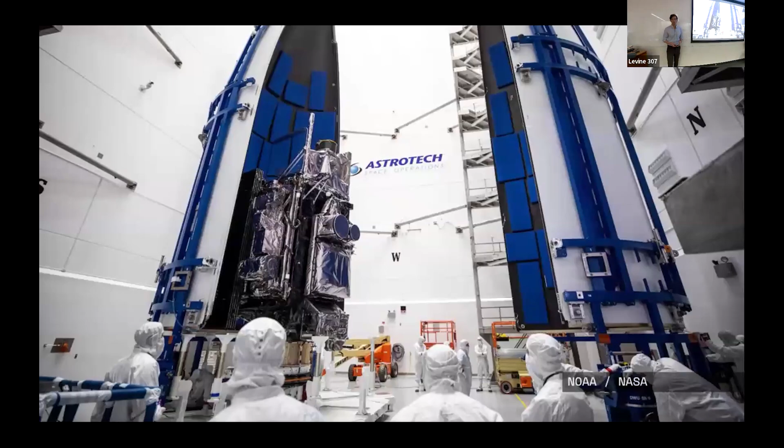trying to design and fabricate robots or using principles from modular and reconfigurable robots to perform assembly. But the key challenge we're interested in is trying to enable end users to design and fabricate stuff at points of need. And to illustrate why I think this is important, I'll start with a particularly noticeable point of need, which is the space environment. So anything we launch to space today has to fit within the confines of a rocket fairing, which is typically no larger than 3 or 4 meters in diameter.

And once we package our robots or our structures into these rocket fairings, they then have to withstand the rigors of a launch, which can be upwards of 9 Gs. And once these artifacts reach orbit, they then have to be either assembled or maybe maintained or even repaired by teams of people who don't necessarily have manufacturing experience in some of the harshest conditions that we know of.

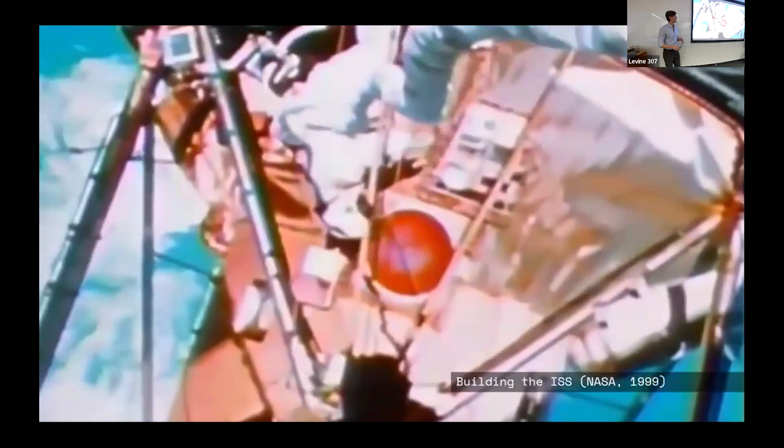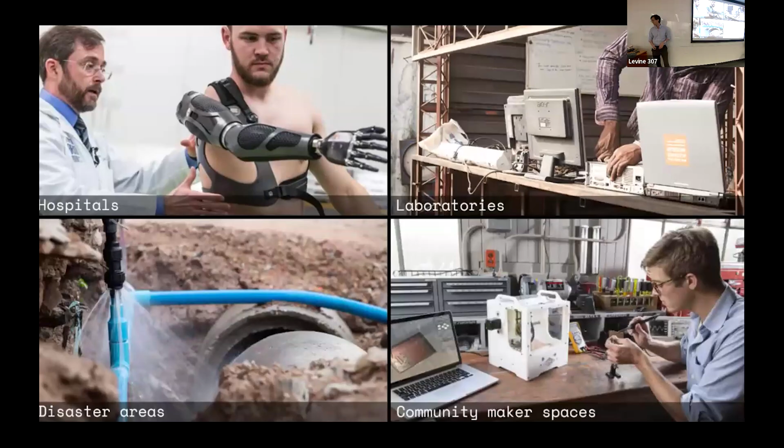But these challenges are mirrored on Earth as well. So in hospitals, in laboratories, in disaster areas, and even community makerspaces, these are all environments that require unique hardware solutions with both speed and customization that a kind of centralized mass manufacturing paradigm that we have today doesn't really provide.

And this is because centralized mass manufacturing places some pretty hard constraints on our ability to customize individual items for individual needs and interests, to deliver them to the right places at times of need, and also to transport them across not just global, but increasingly extraplanetary supply chains, which are subject not just to volume constraints as they're shipped, but also to global political and economic stability.

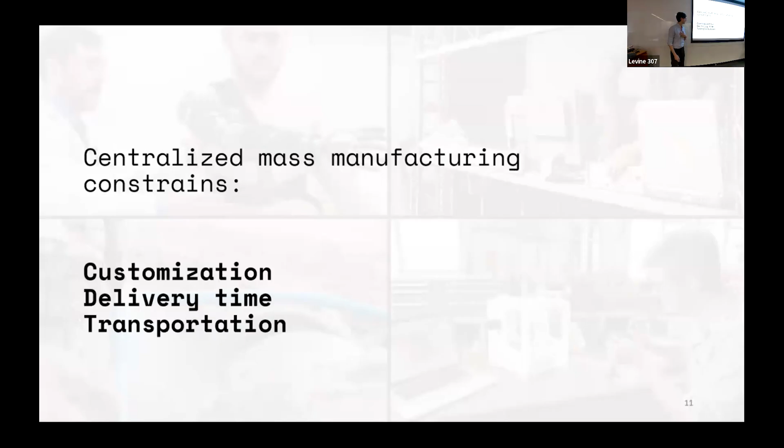And so I think creating new manufacturing capabilities that can be deployed at these kinds of points of need requires addressing 2 key challenges. So on the one hand is portable hardware systems for fabrication that can operate autonomously outside of these traditional manufacturing ecosystems. And second, we need new software tools or new design tools to actually allow users to design new things that these hardware platforms can actually produce.

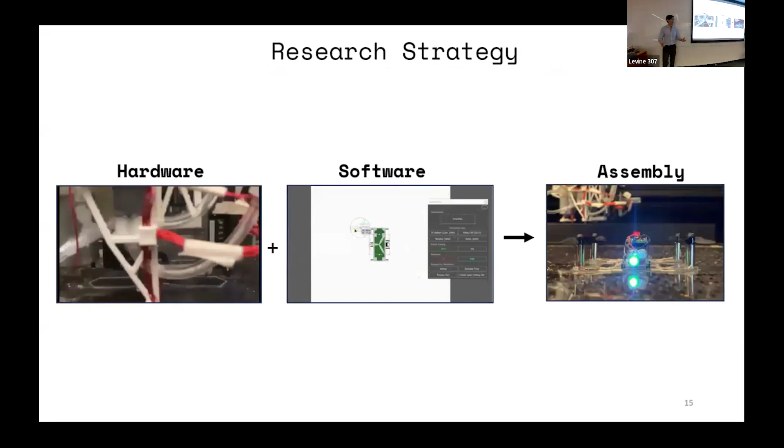And so in our research, we generally co-develop hardware and software systems to allow end users to design and fabricate things at the locations where they are intended to be used.

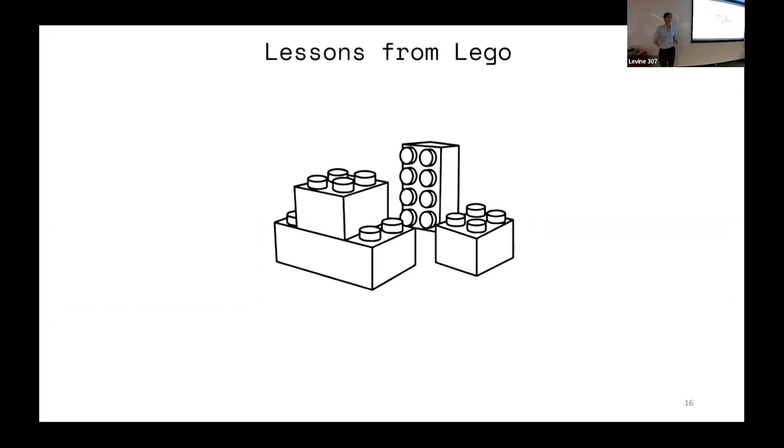So to illustrate how we think about breaking down problems to be solved, I want to start with a kind of toy problem. So I played, the first things I built stuff with was with Legos. Probably the same thing applies to many of you. But Legos provide some unique capabilities. So they can be transported compactly. They can be assembled in very complex geometries. And they can also, maybe most importantly, allow this to be done easily.

So I wanted to highlight 3 attributes that I think make Legos such a powerful platform for manually assembling stuff, and talk to you about why or how we can use these to automate assembly.

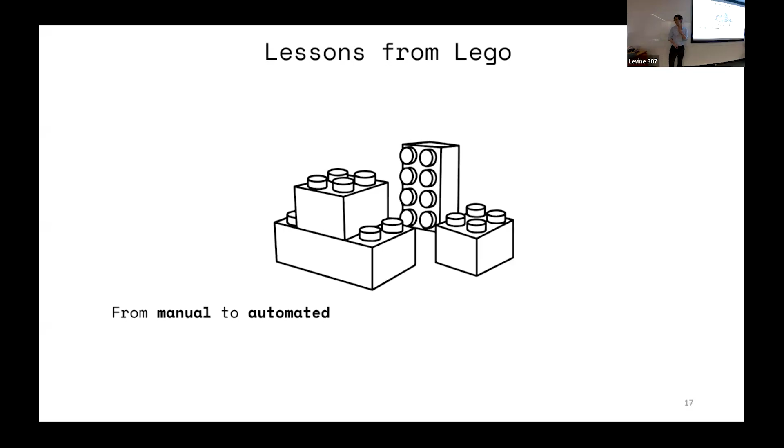So the first thing is that they can generally be assembled by a single person, or a single robot arm. Second is that they're modular, right? So their base unit is a rectangular prism that can be stacked and tessellated in lots of different arrays to make these complex shapes. Third is that they're attachable. So they're patterned with these kind of selectively paired studs on top, which allow them to snap to each other in aligned configurations.

So in this talk, I'm going to talk about 3 different research themes that show how we can exploit each of these features to enable and automate assembly at points of need at 3 different levels: at a machine level, at a part level, and then at a material level.

So the first of these levels is this idea of hybrid manufacturing machines, where the long-term vision is that if we can replace a person with a single integrated fabrication platform, we might in the future be able to package the capabilities of today's factories into the size of tomorrow's 3D printers, and really allow to fabricate individualized, customized artifacts at points of need.

The second is modular assembly platforms, where the idea is by augmenting static parts with embedded actuation, we can produce modular parts that can be transported compactly, shipped to a location, and then autonomously reconfigure into target shapes, allowing us to reuse existing infrastructure instead of always fabricating from the ground up.

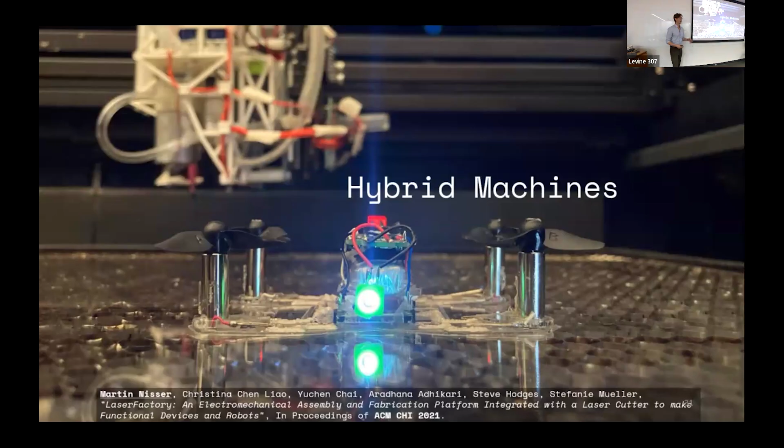Our goal was really threefold. We wanted to make one standalone machine that can do three things: create the geometry of a part, print its circuit traces, and then assemble some discrete components.

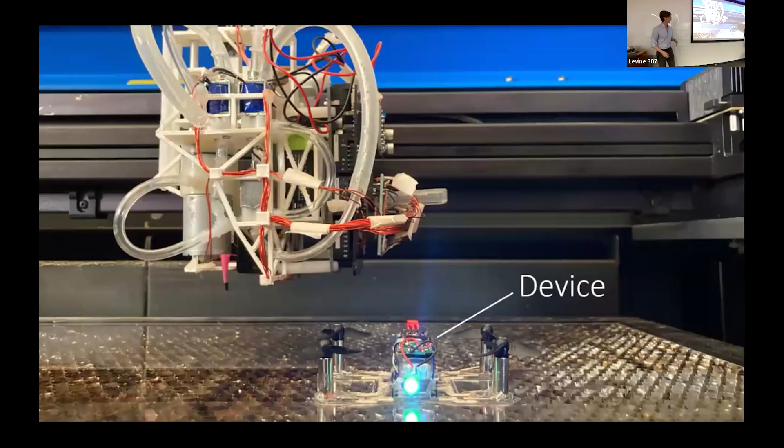The way we tackled this problem was by using a custom-built hardware add-on that clips into a laser cutter. This hardware add-on augments the native laser cutting capabilities with a silver paste extruder which can print circuit traces, and uses a pick-and-place mechanism to assemble components.

We use the laser itself to not only create the geometry of a part, but also to later sinter or cure these silver circuit traces, which we'll see in a second. I'm going to play this one-minute video which goes through the full end-to-end fabrication process.

This process starts with using the laser to cut out the perimeter of an object, which in this case is a quad rotor.

Next, we use an onboard silver paste dispenser to deposit these silver circuit traces. These traces are a silver nanoparticle embedded in a resin matrix, and it's non-conductive in its liquid state. We'll see in a second how we make it conductive.

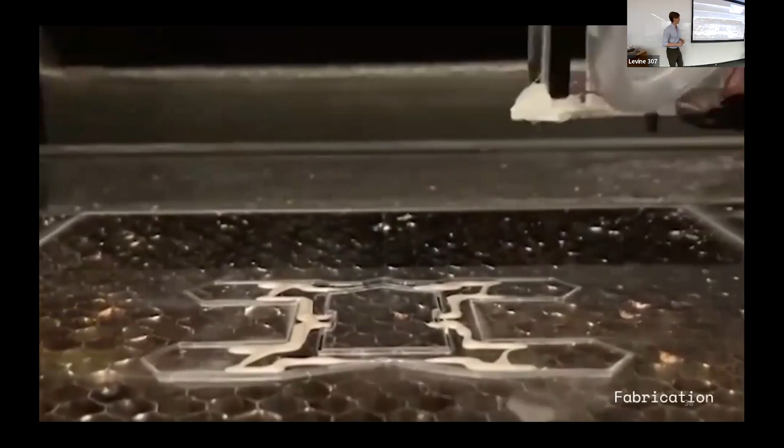Next, we use this onboard pick-and-place mechanism to collect components from a storage area over on the right, and we deposit these components onto the substrate, lining up the pins or electrodes of each component with the circuit traces we just deposited.

Finally, we use the same laser, this time in a defocus setting, to actually heat up and sinter or cure these circuit traces. This has the dual effect of electrically connecting all of the components, but also rigidly bonding them to the board. So in the case of a quad rotor, it's now fully connected and can deploy itself directly off the platform.

I wanted to show a brief simulation of what the hardware add-on looks like. It's built from just $150 worth of commercial off-the-shelf components.

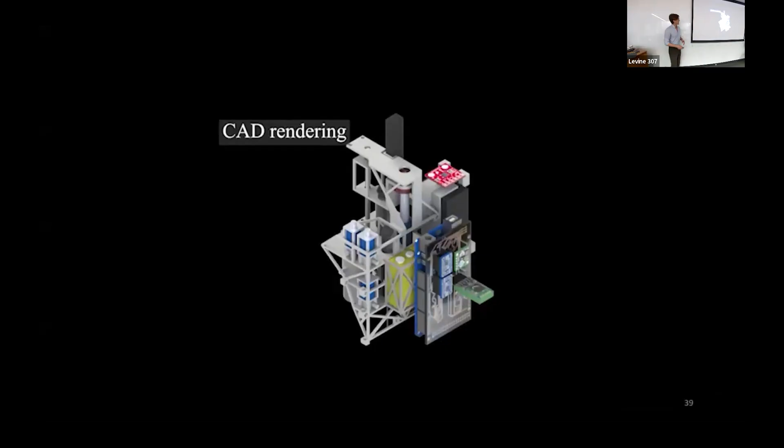It mounts directly to the head of a laser, and it consists of a housing which attaches to the laser using some 3D printed clips. It houses a couple of serially connected batteries which power a microcontroller and some electronics.

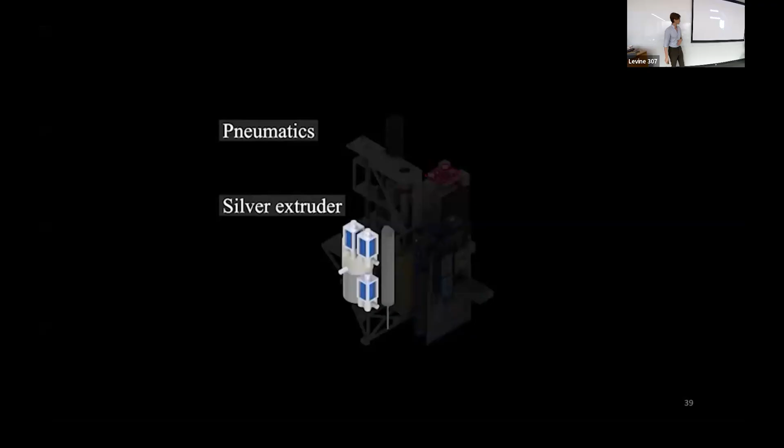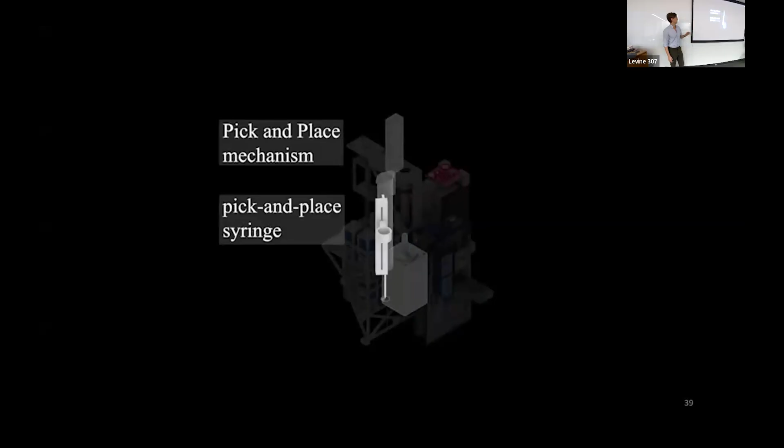This controls a pump, which acts through a series of solenoid valves to control our silver paste extruder. Separately, we have our pick and place mechanism, driven by a stepper motor, which acts through two serially connected linear potentiometers to our pick and place syringe. Together, this provides a compliant transmission which we can use to pick up objects of variable heights.

Martin, how does that pick and place grasp the individual objects? Yeah, so it's just like a commercial off-the-shelf little syringe with a little suction cup on the bottom.

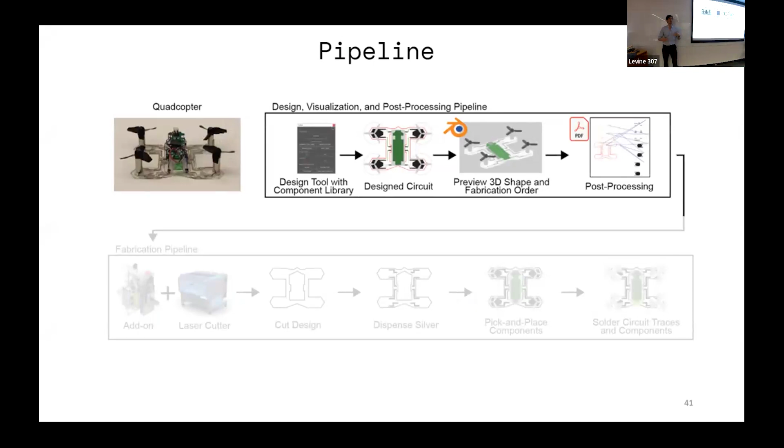So I just kind of zoomed through the fabrication process and what the hardware looks like. Next I'll switch gears and talk about the software pipeline, or the design tool we use to actually design these artifacts and how we transmit them to the machine for fabrication.

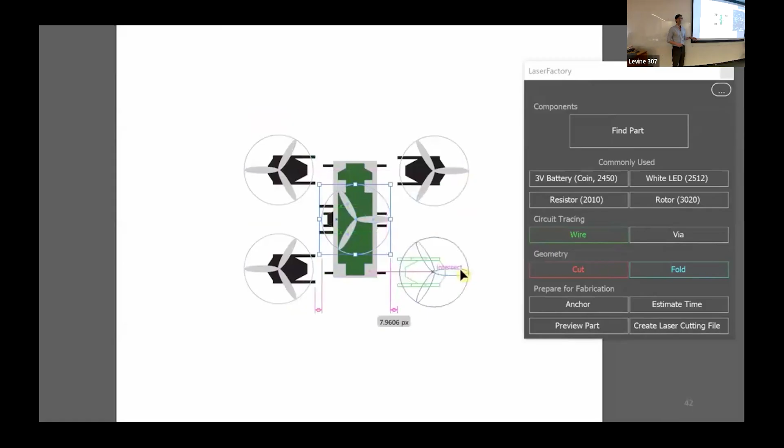We built a custom interface as a plugin to Adobe Illustrator, where you can drag and drop parts from a part library onto this canvas, and then use a set of circuit tracing tools to connect these components with little green wires, which stand in for the circuit traces.

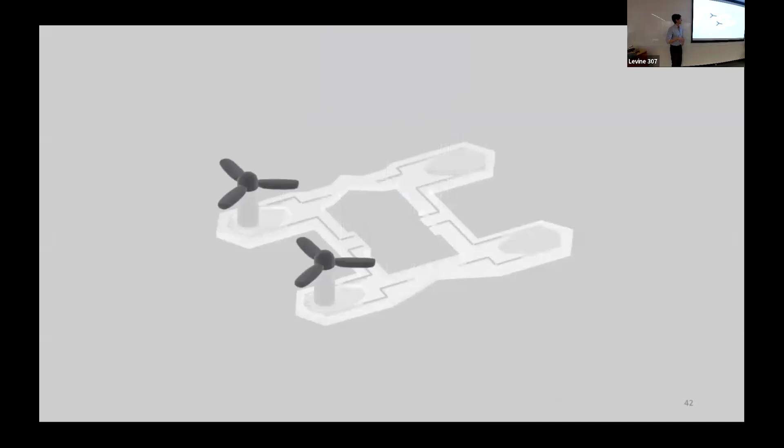Then we can go to our geometry tools and start to place cut lines. These red lines define the perimeter of the quadcopter. Once we've finished the design, our system can animate the full sequence of fabrication events so we can check for correctness, going through all the steps from cutting to silver paste deposition to part placement, and then finally sintering.

Does it generate the CAM autonomously? Yes, and that is my next slide. Yeah, that's a great question.

Once we've designed these files, we run a post-processing script that translates this user-defined design file into a manufacturing file that we deploy directly on a machine. This is a simplified version of what the manufacturing file looks like. A couple of things are required to get this to work.

One thing you'll notice is that we have these cut lines shown in red and these soldering or sintering lines shown in purple. They're directly superimposed because the sintering is taking place inside the cutting geometry. But the trajectories for the silver paste deposition, shown in yellow, are totally offset from the cutting lines. This is required to offset these two to reflect the physical distance between the laser and the silver paste dispenser on the machine.

We have to do a few other things. We also have to automatically generate pick-and-place trajectories so that our tool head can collect components from the storage area, defined abstractly by this dashed line, and then place them on the substrate. We have to do this in a way that guarantees collision-free placement of the parts.

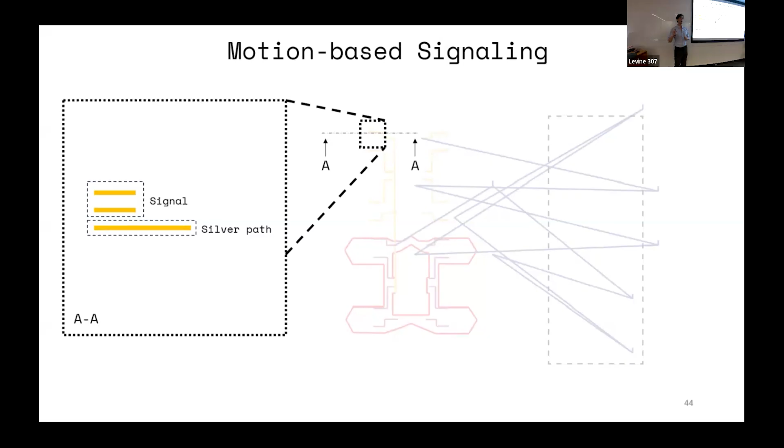This GIF demonstrates this feature to start silver extrusion, where I've magnified this little jiggle at the beginning.

What's nice about this method is that because there's no direct communication between the hardware add-on and your fabrication platform, we can effectively deploy this hardware add-on on any manufacturing system, or certainly any laser cutter.

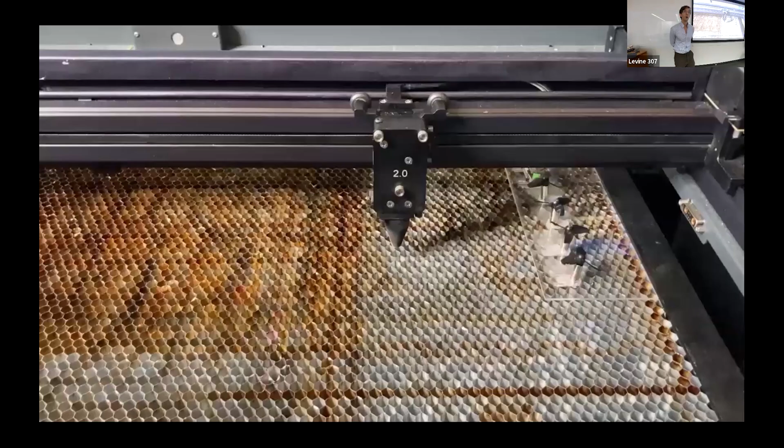Yeah. But still— oh, sorry? Got confused with the back and forth. Yeah.

Is this part of a calibration process? Yeah, so whenever we have, for example, a circuit trace, we'll append these little lines that result in this jiggling action at the start and at the end of that circuit trace. In the fabrication instructions given to the laser cutter, before it tries to extrude silver paste, before it goes along the path that the silver should be deposited over, it first executes this little jiggle. We have an onboard accelerometer that can detect this jiggle, and a motion classifier where we've characterized that to be associated with start silver extrusion or stop silver extrusion.

Does that make sense? So you're basically using these as separators for between different operations. Yes, essentially. For now, we use it to trigger, so to start silver extrusion, to stop silver extrusion, and the same thing with pick and place. So to descend, to pick up, and then to descend to place. Just to recap, so I actually understand.

So you did not want to talk directly to the laser cutter software itself. What you had to do is offset the initial drawing for the tool offset, since the laser is offset because the paste is like 150 millimeters behind. So your tool head, the laser cutter, is in its weird position that you already offset. But you still have no way to say deposit the paste as you're going. So you said, let me wiggle the laser cutter. When you wiggle it, the controller says, oh, we have to start depositing paste while we trace, and wiggling again says, hey, we're no longer moving the laser head, we no longer have to paste.

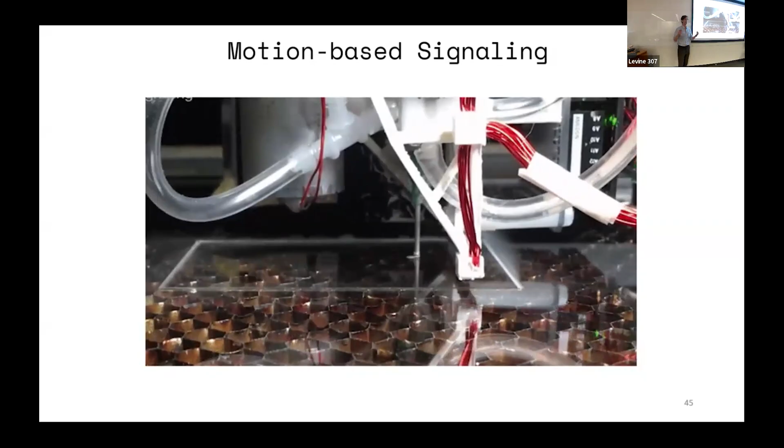Does that mean you end up with a little extra blob of solder paste at the end, before it realizes the end jiggle is telling it to stop? If the jiggle can happen fast enough, it doesn't happen. Oh, you said this one's exaggerated. Yeah, exactly, that's one of many characterizations we have to do to get it to work well. It also helps to cool down your silver paste so it's much more viscous before deposition, which also helps. There's lots of different things we can do to make it better.

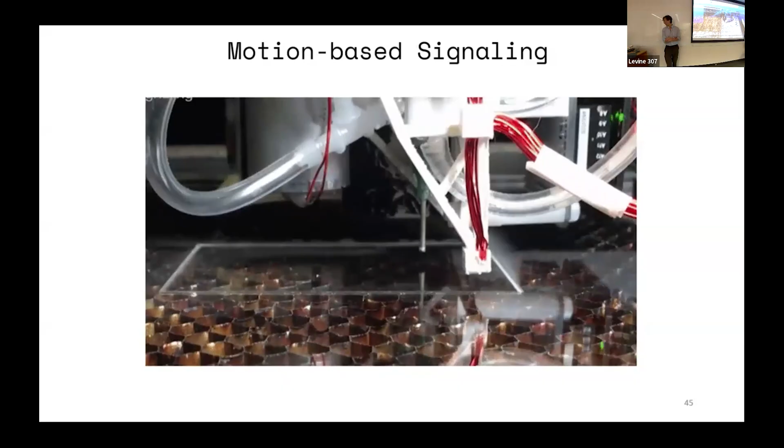Because we don't have to do anything in terms of communication between the hardware add-on and the cutter, setting up for fabrication is super straightforward. All we have to do is mount this add-on to the laser head with a couple of 3D printed clips, insert our material, and then we're good to go.

And so put together this, oh yeah sorry. Martin, do you think this could work with 3D printing as well, since it's extrusion? Yeah, like mounting this kind of thing, you can laser cut and print at the same time, 3D print. I mean, yeah, I can imagine a system where we basically added an FDM print head onto a laser cutting platform. I think it's super exciting. Yeah, I don't think I've seen that before, but it's an interesting idea.

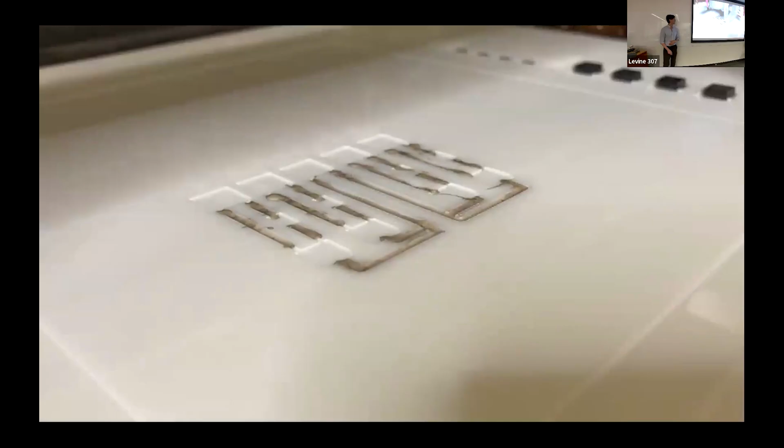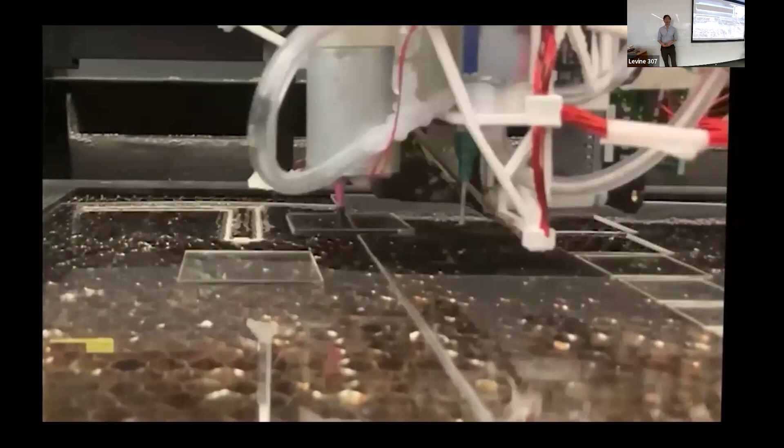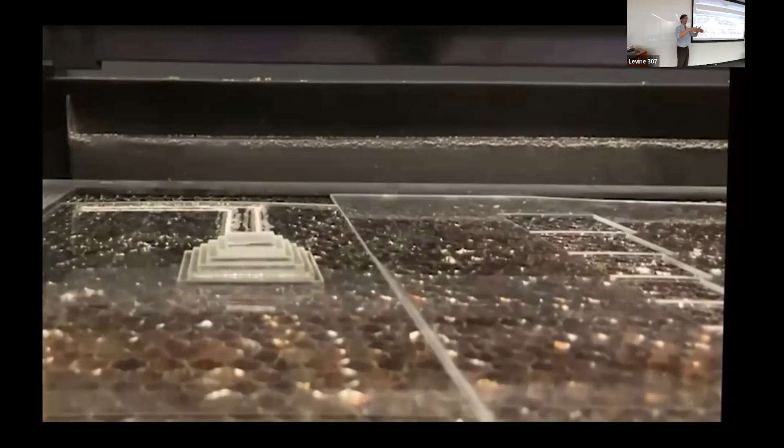So put together, this kind of end-to-end system affords a range of other functionalities as well. One thing we can do is create more complex PCBs using just a standard library of parts. So here we're creating an H-bridge using a set of transistors and resistors. We can also quickly cut and stack material to create 3D geometries without the support needed for overhangs, which you might typically find in a normal FDM printer. We didn't publish it in this paper, but you can also focus the laser at the interfaces of these materials to actually bond them together, so they won't just be sliding on top of each other.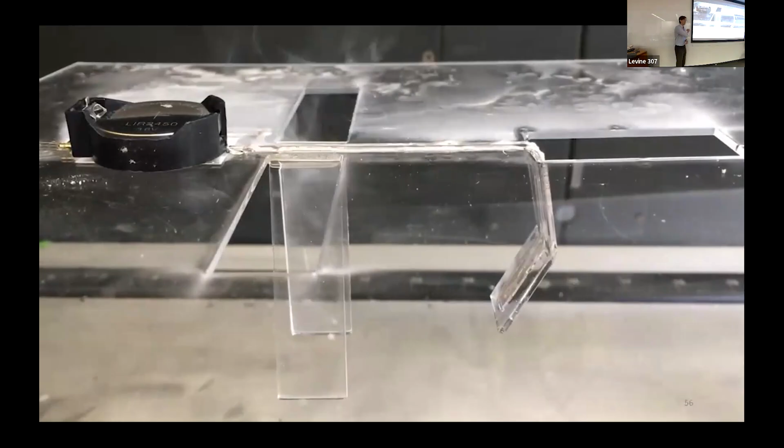We can also create 2.5D electronic devices in another way. Here's a kind of simple lamp that's fabricated in one go. The intended use case is that it clips onto the top of your laptop to provide lighting for the desk to the right. We can fabricate this in one go by using the laser to heat up our material until it becomes compliant and folds under its own gravity. We can write our circuit traces in a way that straddles these hinges, so you'll see the light turn on here at the end because the circuit's electrically connected. We have this fully functional device before we even remove it from the laser cutter.

So I just introduced this example of a hybrid machine where we showed that by consolidating different manufacturing processes in a single platform, we can build small mesoscale artifacts like simple robots in one machine. The common digital fabrication machines in use today are primarily laser cutters, like the one we showed here, as well as FDM 3D printers. Both of these provide a really good foundation for hybridization in this way.

But in particular, the most common kind of printer in use today is the FDM printer. Two of the reasons why they're so great is that they're super inexpensive, so you can buy a pretty good one for around $300, and they're also very compact. Generally they're about the size of a microwave, so you can put it on your desktop.

But one of the problems with these really accessible, inexpensive machines is that they can typically only print stuff out of plastic. And so the stuff we print generally isn't very strong, not very stiff, and not very recyclable. We generate a tremendous amount of waste, particularly in the rapid prototyping phase.

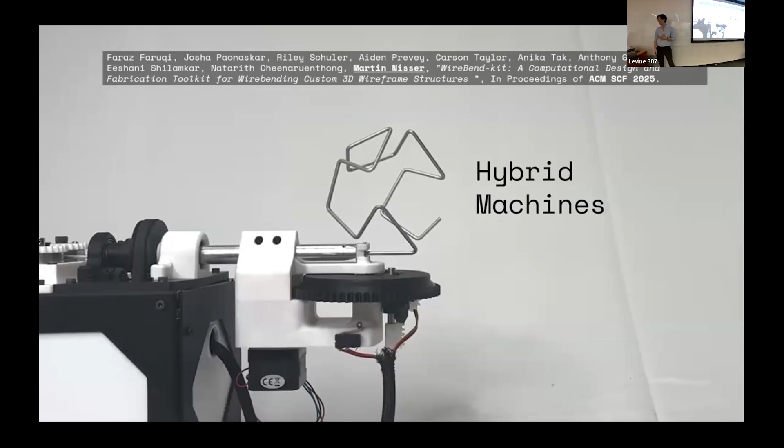So we bend parts out of metal, and we do this using 3 different operations. We are feeding in an aluminum rod from the left - that's one operation. Our end effector will bend that metal into a 3D shape. We also have a rotate operation, which rotates the bending plane. Without the rotation aspect, we'd basically have built a glorified paperclip machine - and it turns out that's actually how you make paperclips, using these bending operations.

These fabricated geometries take about 60 cents in aluminum material cost to print. We can bend objects like the one you just saw in around 3 to 4 minutes, so it's drastically quicker than FDM printing as well.

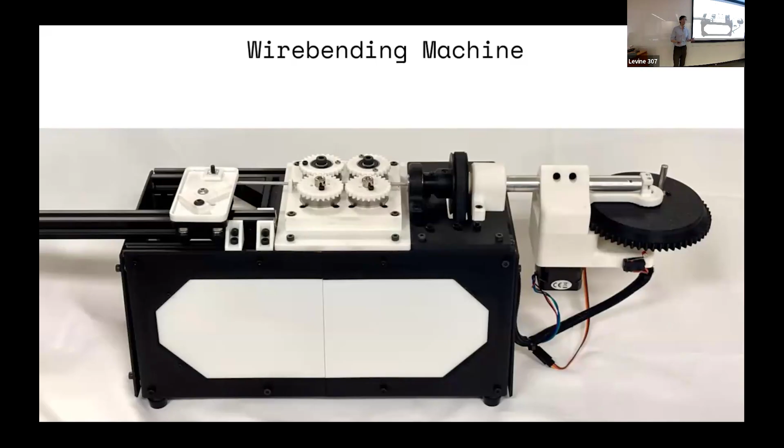And the machine itself is built from around $295 worth of commercial off-the-shelf components. We designed it from scratch specifically so that it can be assembled primarily from 3D printed components, so you don't have to machine too much to get this thing built.

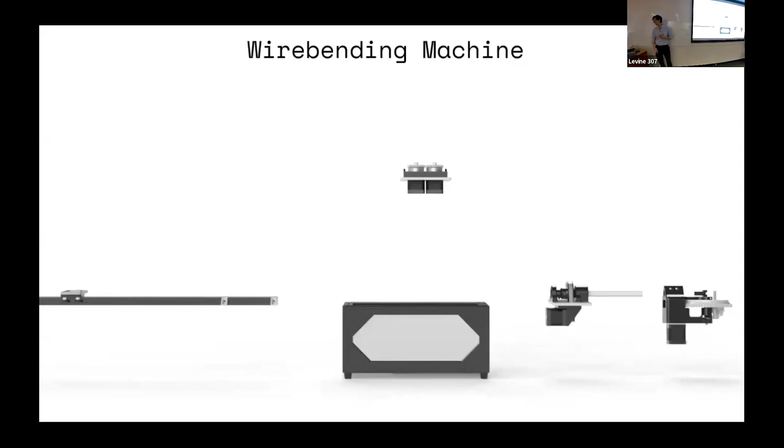So the machine itself can be broken down into a few key sub-assemblies. First off is the feed assembly, which consists of a pair of stepper motors that essentially grip our feedstock and translate it, pulling it through into our bending sub-assembly. We have another sub-assembly, which we affectionately call a tail rail, where we clamp the distal end of the rod to constrain it in rotation while we're feeding it forward and to support the distal end.

The bending assembly over to the right is the sub-assembly that actually performs the bending operation - it's the only part of the system that actually deforms the material. The rotation assembly is there simply to rotate the plane of the bending, so that turns the entire bending assembly. And finally, the frame houses our electronics and holds everything together.

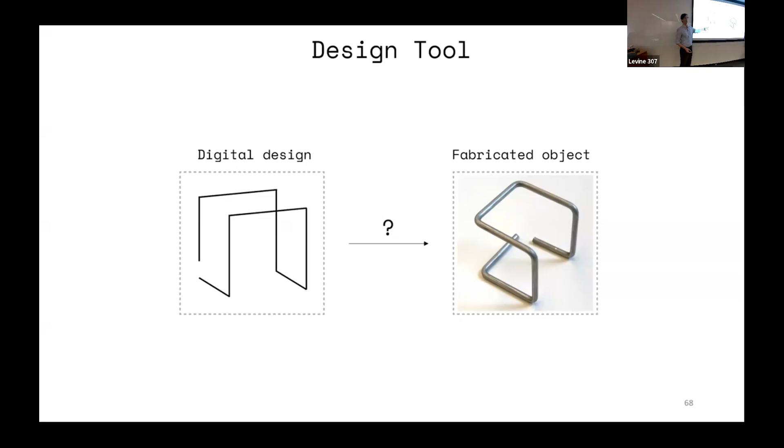So the question you had was, how do we go from a wireframe design into a fabricated artifact? And maybe more importantly, how should we try to get users to design this thing in the first place? Because it's not super intuitive how one would wish to design something like this.

So we created a pipeline where in the design phase, you can start by uploading a 3D model, and then we convert that into a wireframe. Once we finalize the design, we run a set of post-processing instructions that turn that design file into a set of fabrication instructions. We also bake in some error correction that tries to adjust for error sources in our materials, as well as the geometry of our machine, which I can touch on later.

And then finally, we basically generate our version of G code, this text file, which we can upload to our machine and then execute fabrication. So I'll just kind of talk through these first four steps above.

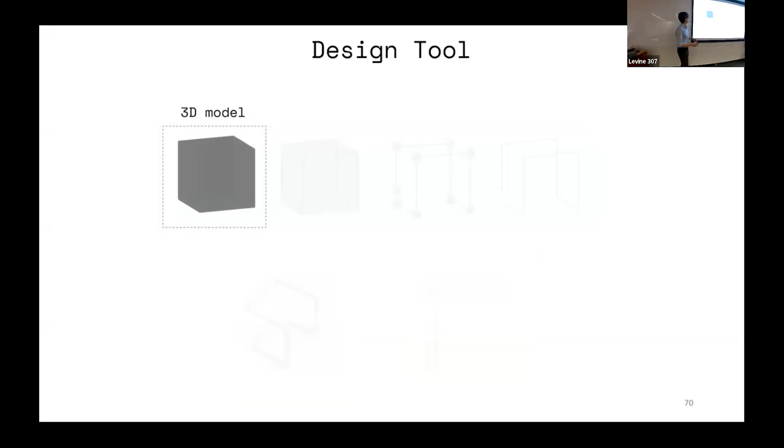In our design tool, which I'll show a couple of videos of in a second, we start by prompting a user to upload a 3D mesh, a 3D model, like this cube. Then we ask the user to trace out a wireframe across this cube. You can click on the vertices or corners of this mesh, and it will automatically append those lines with edges to construct an initial wireframe geometry.

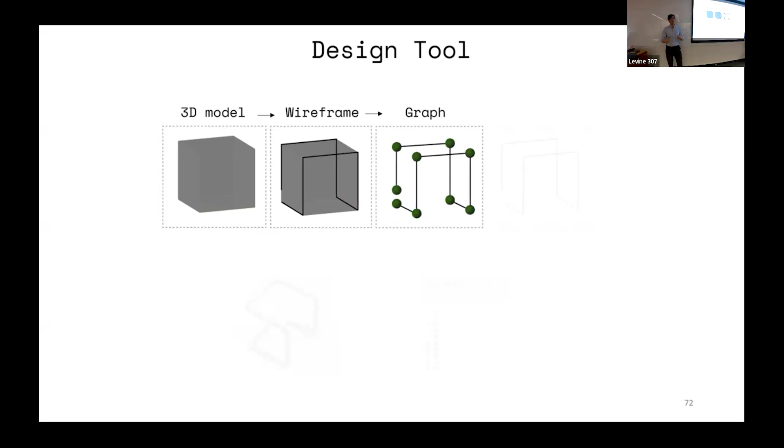We then represent that wireframe as a graph, and we do some simple path planning through that graph, where we're searching specifically for an Eulerian circuit, meaning a path that covers every edge exactly one time. If that constraint is satisfied, we can bend the 3D geometry from one continuous length of wire.

Once we're happy with that design, we can export that 3D path, and then perform all this processing to turn it into fabrication instructions for our machine. So I'll just play through a couple of videos that show how we actually use this design tool to make exactly this cube.

We have this interface written in Python in the Blender environment, where we can start by uploading a 3D stencil, like this cube. Now we're going to click through the vertices of this cube, and we're just going to leave behind this wireframe. Might be a little hard to see — it's these black lines.

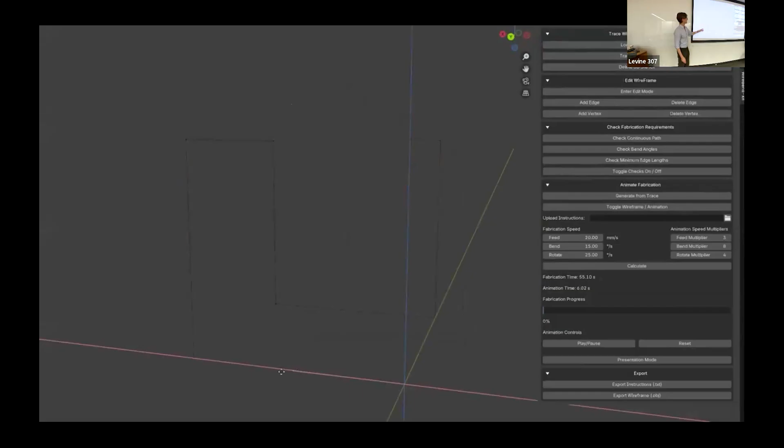After we have that initial wireframe, we can move around vertices and edges. We can add vertices, delete edges. We can augment this as much as we want.

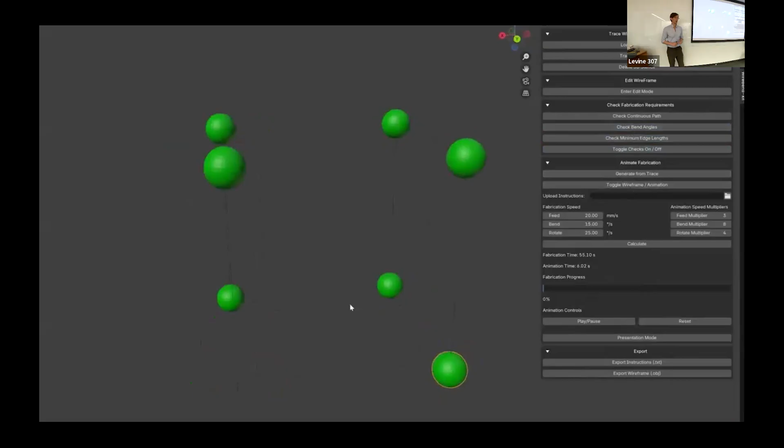Once we're done, we can run a series of fabrication checks. I won't talk in detail about what these visualizations mean, but we can check for path continuity, whether we're satisfying or violating any maximum bend angles that a machine can execute, and whether we're violating any minimum edge lengths, which is also a machine-specific constraint.

Once we're satisfied with our design, we can then animate the fabrication instructions. Here we're animating the sequence of fabrication instructions we'd expect to see, and we can use this to check manually, for now, for collisions.

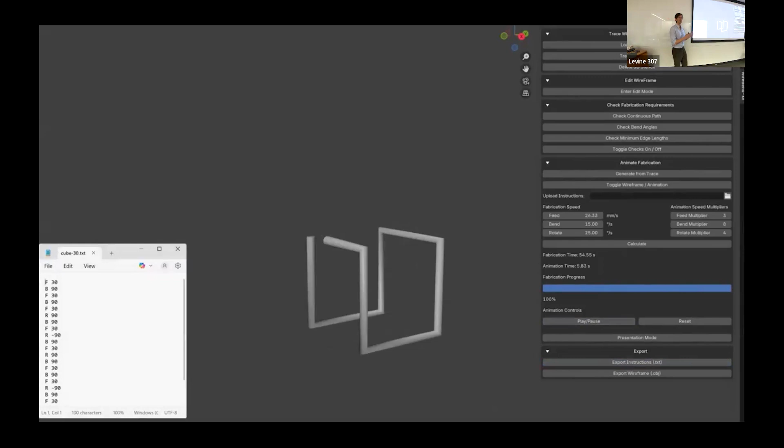At the end of this process, we can export this as our custom G code, consisting of a sequence of feed, bend, and rotate commands with an argument. This is kind of like a custom slicer, where we visualize things layer by layer and then export this G code. We take this text file, upload it to our machine, and execute these commands.

We do some extra steps here too. I mentioned error correction — we also have to add things like homing instructions and other steps to make this work.

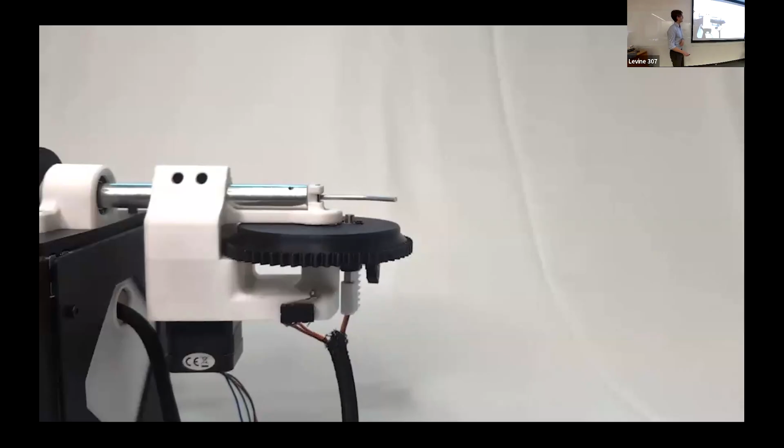Right now we actually just finished this project pretty recently, and we're presenting it next week. This first milestone was to see if we could build this end-to-end pipeline to try to recreate, with these aluminum wireframes, some simple objects that you might typically 3D print today. We focused on some human-computer interaction applications, trying to recreate household objects.

I don't know how much struggle you have with your cups when you go to Starbucks — so here we have a cup holder. Here we're printing a pegboard. I think a lot of the students working in the lab right now like to play a lot of Xbox, so this is one of their ideas.

I'll just let this video play — I think there's this geometry and then one more. So right now we're able to make these centimeter-scale items.

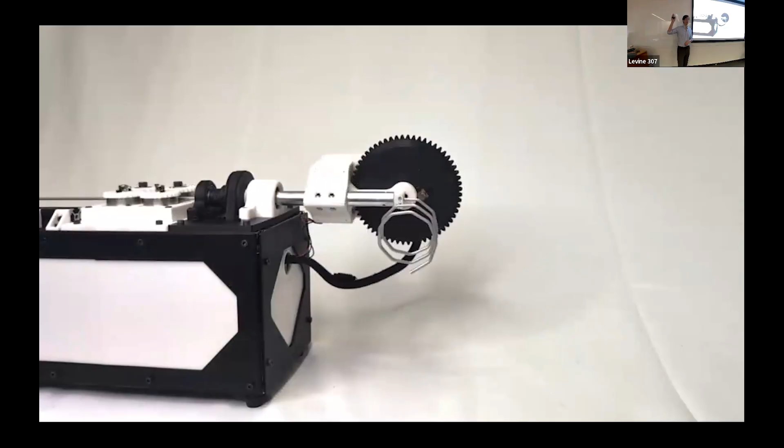But one of the research directions I'm really excited about is whether we can build a machine like this that can produce meter-scale structures, particularly in a microgravity environment. You could have a small, desktop-sized machine that you launch together with a big spool of material to orbit, and it would extrude meters and meters of this material to create larger-scale structures. That's kind of the vision for this project in the next few years.

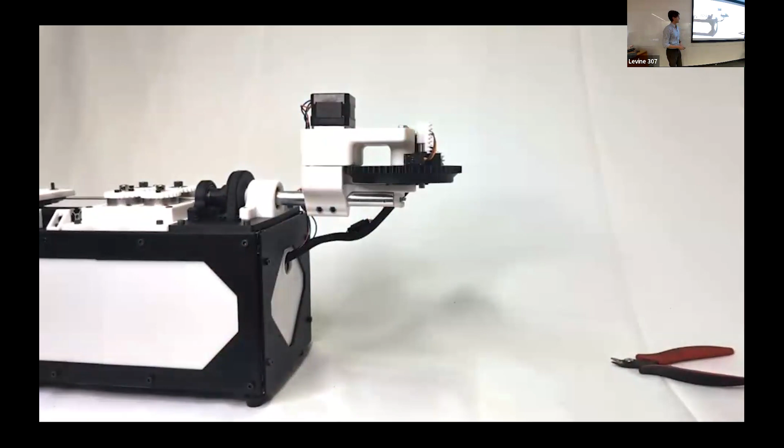Do we have any kind of compact notion of what is the space of designs that can be realized by this? Yeah, this is kind of like the big problem we have to solve to make this really useful. So there is some existing work, and two of the main problems, there are a few problems to solve.

One is that not every graph has an Eulerian circuit. A simple example of this is like a T: you can go up the route, then you have to turn left or right, so you can't do both. There are techniques to get around this, like adding double edges to some areas of the graph, so you can turn one way and then go back.

There are also physical constraints. Our bending machine can't bend all the way to 180 degrees. That's not because of the machine design, it's because of the material itself. Aluminum is elastic and exhibits a phenomenon known as spring back. So if I bend it to 90 degrees, it's going to spring back to 80 degrees. If I bend it to 180, it's going to go back to roughly 170. So those are some of the big problems.

Another challenge is how much of this we should try to automate. We had an idea in the beginning of whether we should take a mesh and automatically find a path that was fabricable and then give that to the user. We have this interesting conflict where the user might have a very specific idea of what they want, and if you perturb that mesh or adjust some edges, the wireframe design might not be what the user intended in the first place. It's a really tough problem, but one of the big ones to solve.

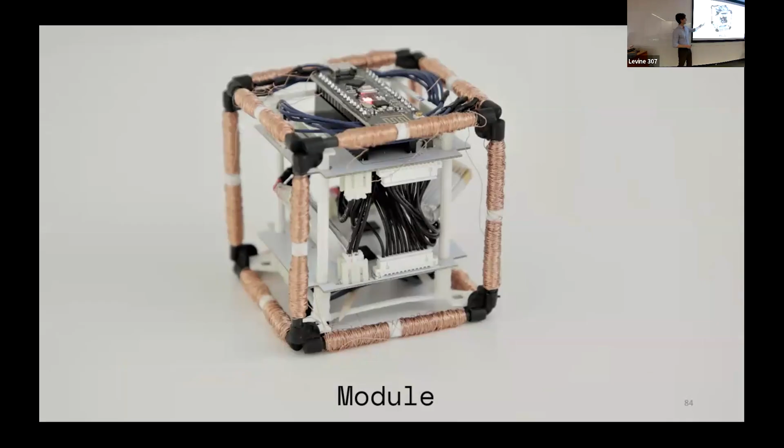We allow this reconfiguration using electromagnets. We built these modules that are around 50 millimeters side length, and we embed these electromagnets in their edges, which allow them to pivot with respect to their neighbors. The electromagnets are these golden or copper-colored things that look like cylinders in the edges.

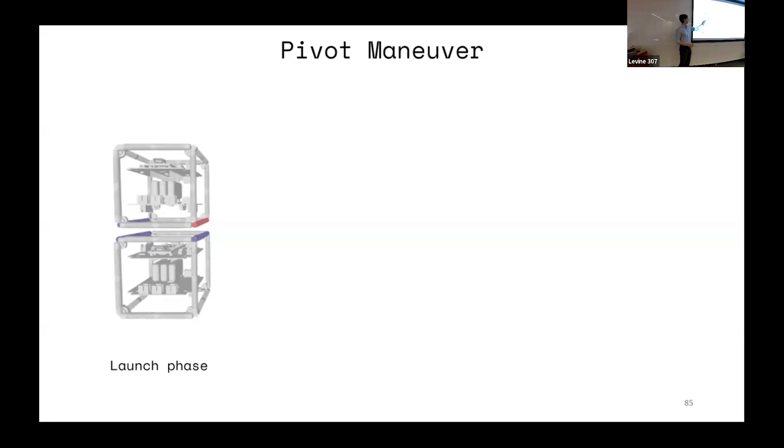To show how we use pairs of electromagnets to enable this pivoting technique, I have this slide where we have two of these voxels, and I've color-coded four electromagnets according to the direction in which they're polarized. So you can imagine the red electromagnet has its north pole facing you, and the blue electromagnet has its north pole facing into the page.

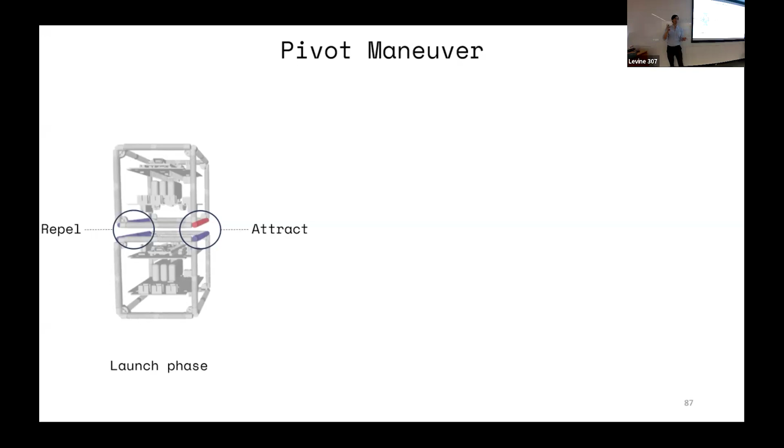If we have two electromagnets that are polarized in different directions, they're going to attract each other and form a hinge. Two electromagnets that are oriented in the same direction are going to repel each other, which we can use to actuate the pivot.

After we've launched and are into the travel phase, we can maintain the hinge with the attractive electromagnets. Once we complete the pivoting maneuver, we can energize a second pair of electromagnets to lock or stabilize the two cubes after they've completed the maneuver.

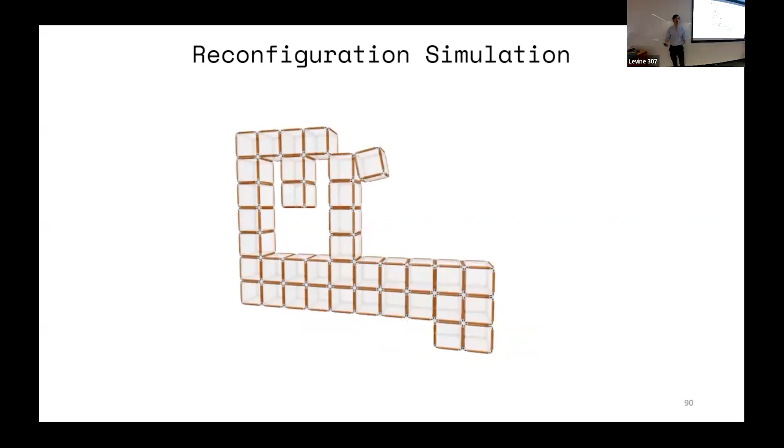And we chose cubic modules for a reason. It turns out there are lots of useful algorithms out there that show that if you have some 3D structure that's been discretized into voxels, there are ways you can reconfigure that structure into a new structure.

You need to update this so it says UPenn. I've taken this image from a paper by Cynthia Sung a few years ago, who of course has done some awesome work in this space.

But the point I want to make here is that many of these algorithms require you to be able to perform two key primitive maneuvers. One is a simple pivot, where we have two cubes pivoting around a shared axis. The second maneuver is a traversal, where one cube pivots off the face of a second cube and onto the face of a third.

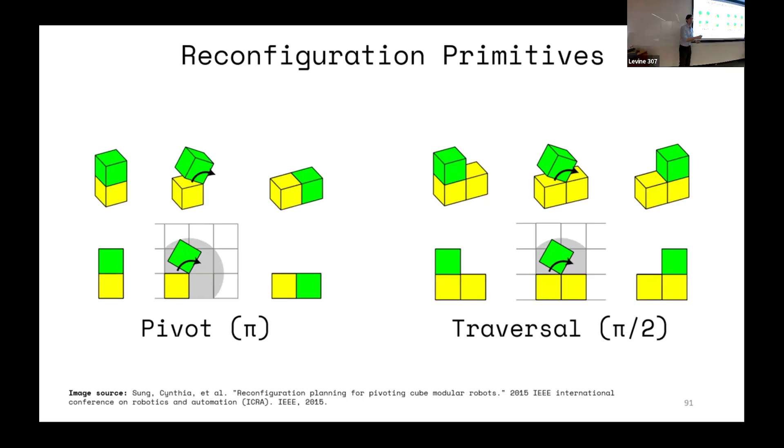Our key goal with this particular paper was to show that we can use our electromagnetically actuated pivoting technique to perform these two maneuvers, so that we could conceptualize how we'd reconfigure larger arrays of these structures in microgravity later on.

So we built an array of modules, and we started with testing them on an airtable in the lab. An airtable, if you've ever been to an arcade, is like an air hockey table, it provides these little cushions of air, and you can use that to simulate microgravity.

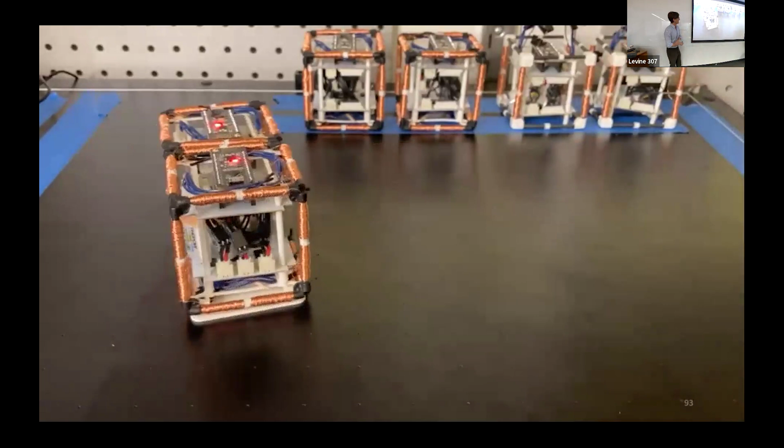So in this video, we're going to use these electromagnets to perform the simple pivot maneuver. All these videos are in real time, and they're being commanded from a laptop out of frame. So that's the pivot maneuver.

Next, we do the same thing for the traversal. It turns out it's very difficult to hold three cubes with one hand, so it takes a little time to set up. Once we turn on our machine, we can then execute these traversals as well.

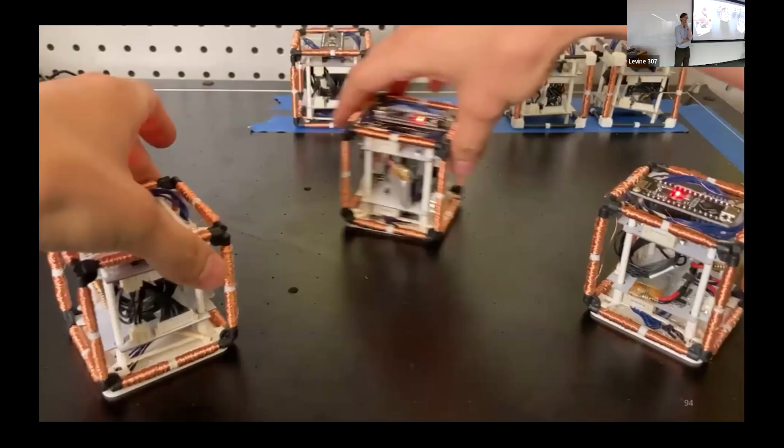You ever find that we get stuck partway between two configurations where both edges were able to attract each other? Like during the traversal, if it got stuck in the middle, if it bumped into something and now there's only one edge, but it's no longer moving towards its next attracting edge?

Yeah, I think I expected to see that problem, but then we didn't. It turned out it was actually very easy to get it to work on an Airtable, at least. I guess the reason being, as long as you have a big enough push, there's very little viscous force or friction on this Airtable to slow you down. So as long as you start moving, you're almost guaranteed to collide with that cube you're pivoting onto. And the same is much more true in microgravity as well.

Do you expect to encounter any issues with noise when you scale this up? Do you think having electromagnets is very close to a bunch of devices being wireless? If you scale up to many cubes, and you have relatively strong electromagnets next to a lot of different devices all communicating wirelessly, do you expect to run into any noise issues around the ability to scale it up?

Yeah, it's a great question. I don't know exactly. It's definitely something we would want to check for. When I've thought about scaling up, I never imagined we'd make a wireless system. I guess for the systems I was envisioning, I figured we'd have to do power transfer between the modules. So I always imagined us having a solid connection between all our modules that they could also communicate through. So maybe I haven't thought about that problem enough, just because we expected to do some kind of solid connection for communication.

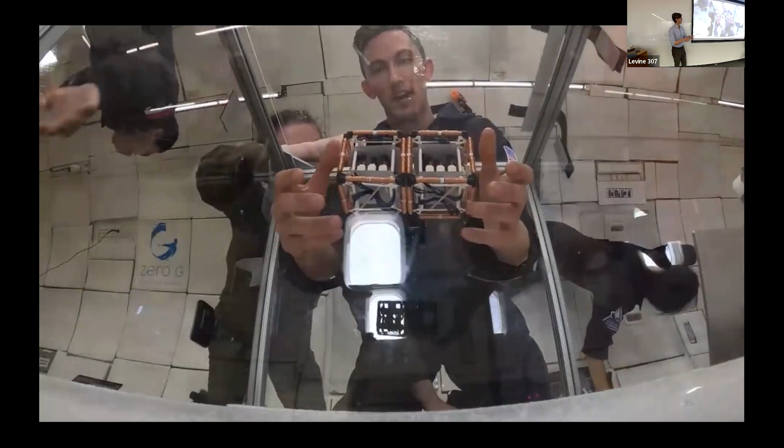So here we're entering a parabola. I'm going to hold these cubes in the center of the compartment and wait for stable microgravity to settle. You can see the people starting to float behind me. Once microgravity settles, I can release the cubes and we can execute this.

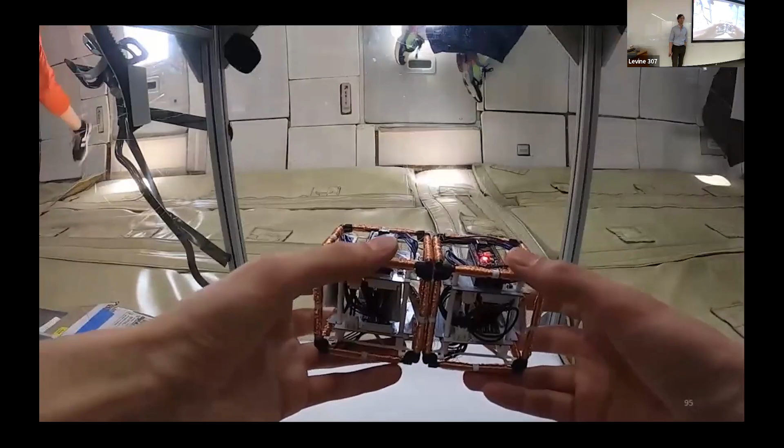I was very happy, you can see that's fine. This is just showing the same video, but from a different angle. That's great.

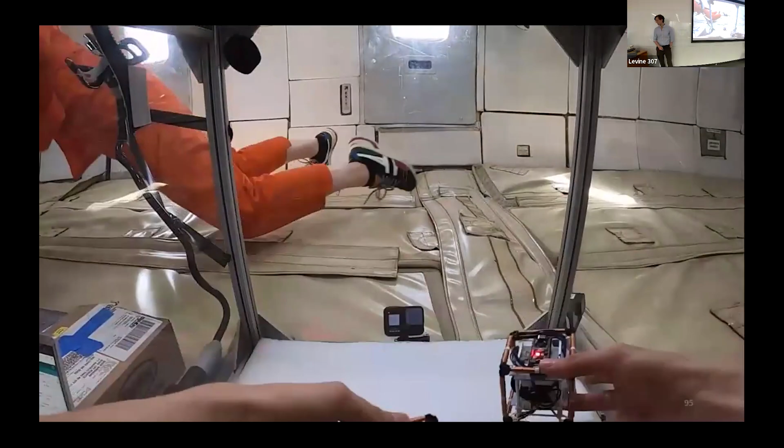A lot of our work went into designing the electromagnets and the electronics used to drive them. We designed and fabricated these electromagnets, then built electronics using custom PCBs consisting of a microcontroller, a wireless module, two 16-channel GPIO expanders, and six dual H-bridges. All this means our PCBs can drive 12 electromagnets bidirectionally.

That's their only purpose. We have these PCBs mounted inside a 3D printed scaffold, and the batteries, which are the heaviest part of our structure, are sandwiched between our two PCBs right in the middle so that we minimize rotational inertia.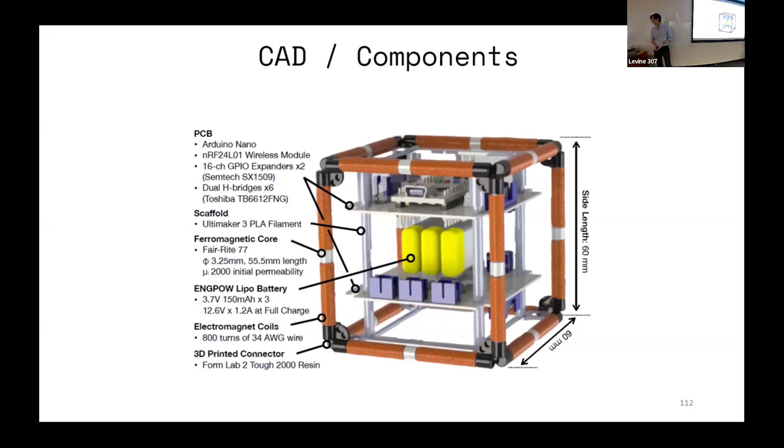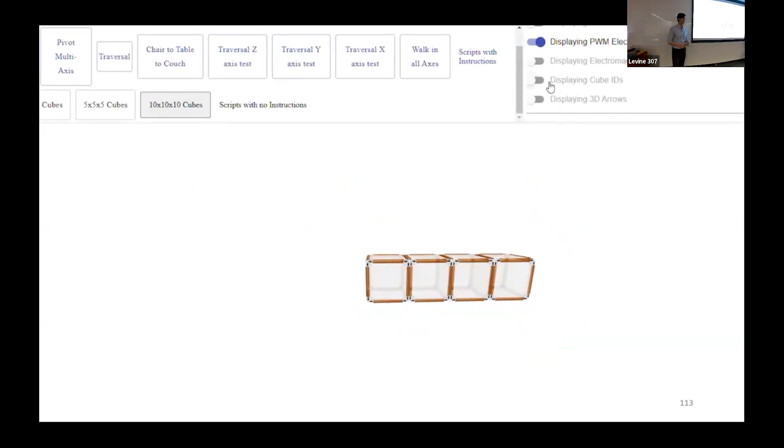Finally, I have this brief video showing a little work we did to come up with a design tool in order to plan some of these reconfiguration maneuvers and calculate which electromagnets have to be polarized and when.

This design tool lets us do a couple of different things. We can display our cube IDs and electromagnet IDs, directly manipulate individual voxels, and visualize the particular electromagnet assignments, shown here in blue and red. We can also visualize which voxels have to be unoccupied to perform a collision-free maneuver, and finally script longer reconfiguration sequences, such as here, pivoting a chair into a table into a couch.

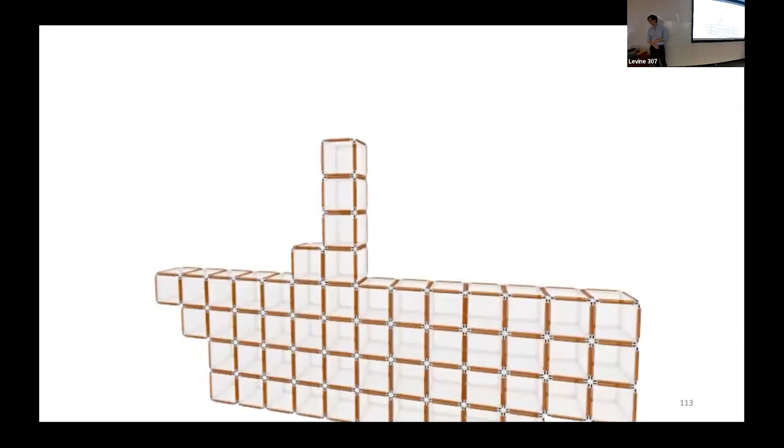So I just talked about this project where we embedded lots of electronics and actuators into every module in order to achieve assembly. But those of you who work with modular robotics know that ultimately we want to get to a place where we can create these high resolution structures with lots of individual modules. But as our modules get more numerous and more small, trying to embed actuation and control and electronics into every module becomes a really tough challenge.

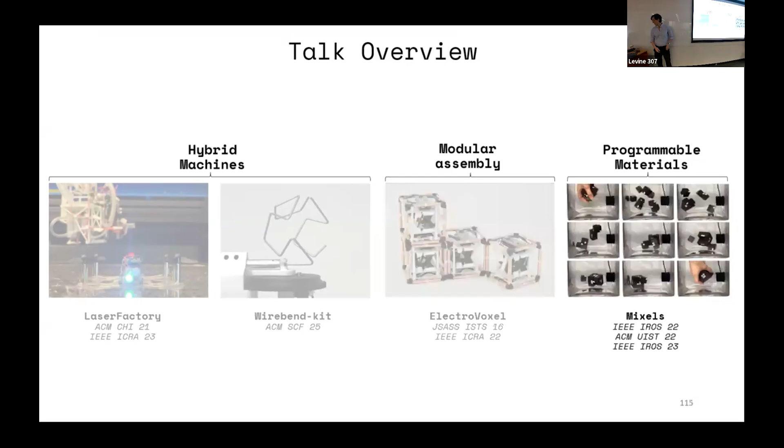And so this final project, instead of embedding electronics into every module, we came up with a way to program magnetic materials such that they could autonomously, selectively latch on particular faces without the need for any electronics or actuators. And our goal for this was we could use materials alone to achieve self-assembly without any external control.

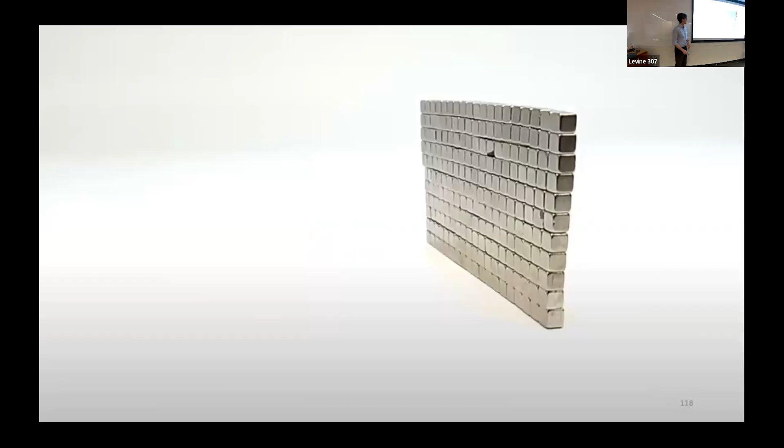As a brief introduction on magnets, one reason we wanted to use magnets was because they're all around us already. You see them in tool racks and charging connectors and cabinet doors. But if you've played around with these before, you'll know that they're kind of very unpredictable about how they're going to behave. So if you have 100 magnets on a table, every north pole is going to want to try to attract every south pole.

So magnets bond to each other unselectively. And so key to this work is how we program magnetic materials to assemble selectively to particular target faces.

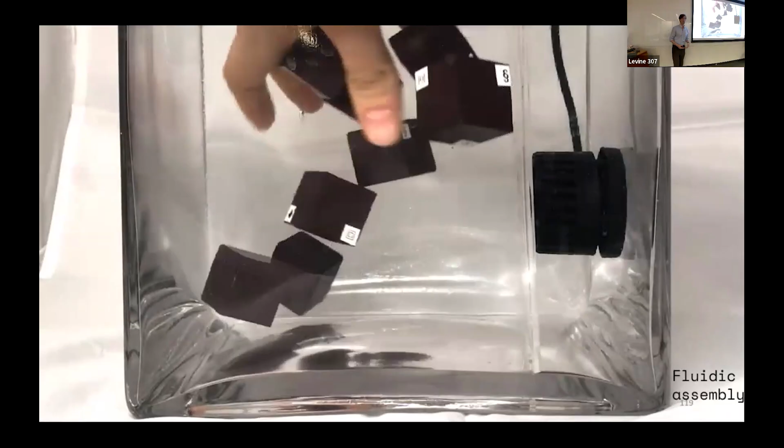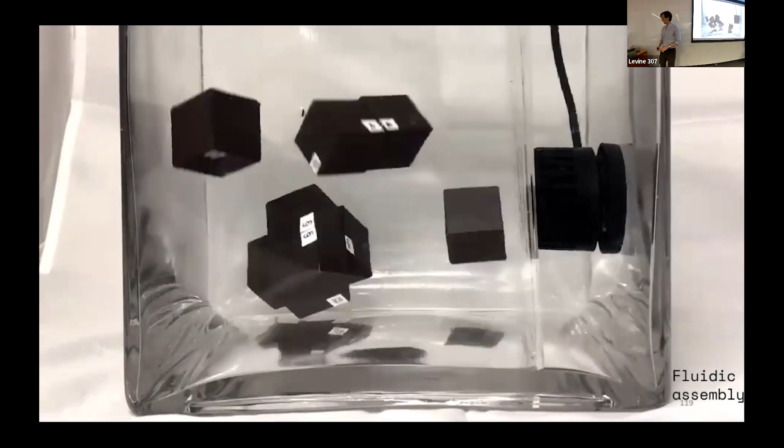So to demonstrate that we can use our program materials alone to self-assemble, here we show how 8 cubes programmed with our magnetic codes can self-assemble in tap water under stochastic agitation from that pump on the right. The key behind this is that we took these little 3D printed cubes, coated them with a magnetic material, and then we program every face with a magnetic signature, where key to their selectivity is the orthogonality in the underlying signatures. In effect, if you program 2 faces to bond to each other, they'll mate, and 2 faces that are not supposed to bond to each other just bump off each other.

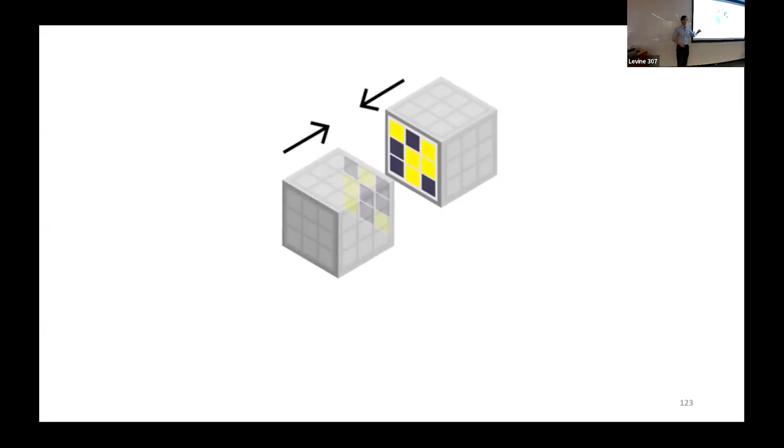So the way we built these is we 3D printed these little cubes, we coated them with a self-magnetic material, and then we built this little hardware add-on with 2 magnets. One of these had its south pole facing down, one had its north pole facing down. And then we can write some G code to stamp these faces to create these different magnetic codes. So every face is programmed with this signature that's kind of like a binary value bitmap, like a QR code, where every blue pixel corresponds to a north pole, every yellow pixel to a south pole. And we can cast these as a binary valued matrix populated with 1s and -1s.

And so the key behind this work is enforcing these selectivity requirements, which we can describe in terms of 2 rules, a local rule and a global rule. To explain the local rule, suppose we have two faces, A and A prime. A and A prime are complements of each other, so wherever A has a blue pixel or a north pixel, A prime will have a south pixel. We want A and A prime to bond to each other in one configuration, but not to allow them to bond in any translation or any rotation. And the global rule just says that we don't want any face within one pair to bond with any other. We don't want A or A prime to bond with B or C, etc.

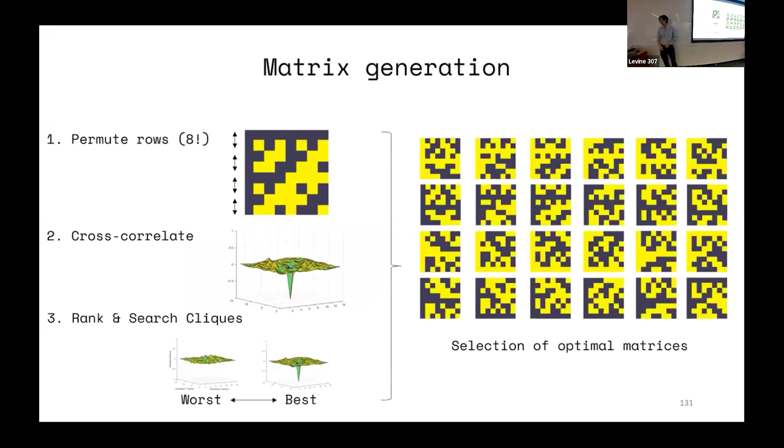So I know we're coming up on time, so I'll gloss a little bit quickly through how we actually generate these codes. And I'll skip ahead to the key results, which I think highlights the key insight here.

So this slide shows the cross correlation between two of these mating pairs. On the z-axis, we have the normalized force between two faces. And on X and Y, we have the cross correlation. You can imagine all we're doing here is we're taking two cubes, putting them on top of each other, predicting the force between them, and then we move them pixel-wise, we translate them one pixel at a time, and we plot the force. So the normalized forces range from maximum repulsion at 1, maximum attraction at -1. And here in the middle, between these extremes, we have magnetic agnosticism.

So when these two complementary faces are directly on top of each other, at place 0, 0, they're perfectly attractive. And this is by design, because wherever face A has a north pole, face A prime has a south pole - that's by definition. But under translation, the net force between these two faces becomes bounded around 0. And the intuition here is that the matrices are designed such that under translation, all the attractive forces and all the repulsive forces cancel out.

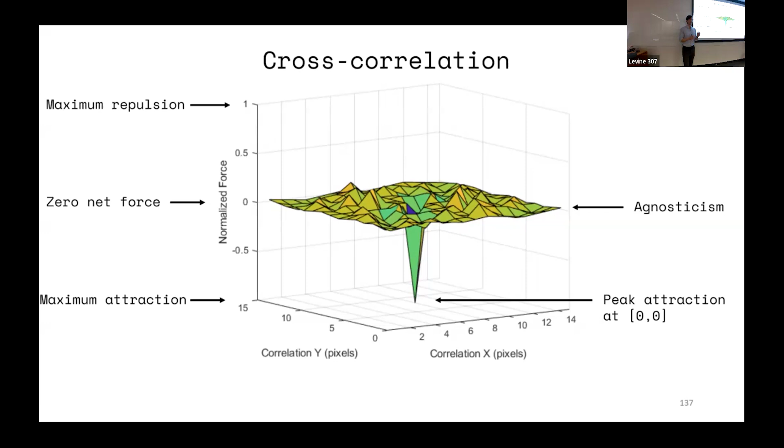I skipped through how we generated these matrices for the sake of time, but the key here is that we generate these matrices based on Hadamard matrices. These are square matrices whose rows are mutually orthogonal, and by searching over many matrices, we can find ones that guarantee very small cross correlations because of the orthogonality between all the columns and rows in the matrices we compare.

Is it possible at all to try and encourage it to repel instead of just saying these two parts don't go together, so let's make them agnostic? Is it mathematically feasible to say pairs that we want to connect attract, and pairs that we don't want, we want them to repel?

I think it must be yes, because you can certainly design two faces such that they share a lot of the same polarity. So you can imagine one face with a ton of north-facing poles, and another face that looks very similar. As long as they have a high number of equivalent polarizations, they would naturally be expected to repel.

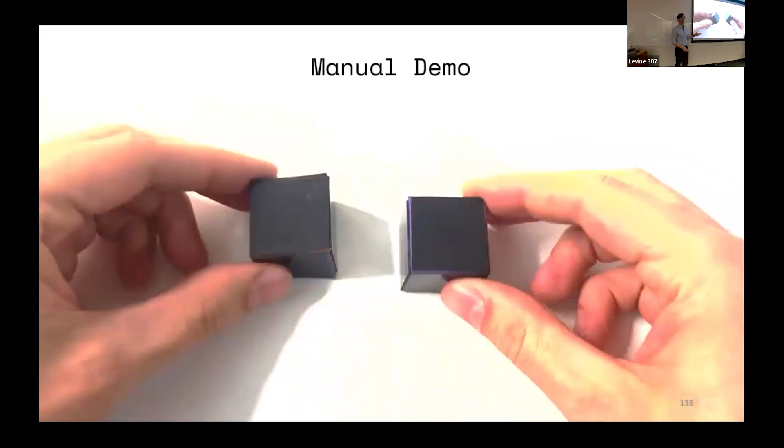I just showed this complicated graph, but I want to show a really simple demo of how this works. Here I have two cubes, and the faces are programmed with these selected codes. We can actually view these codes with magnetic viewing film. When we superimpose these cubes, they attach to each other, but when we translate them pixel-wise, they become agnostic to each other and don't want to interact. The same is true in rotation, until we come back to our initial configuration.

Okay, should I kind of start wrapping up pretty quickly? Yeah, okay.

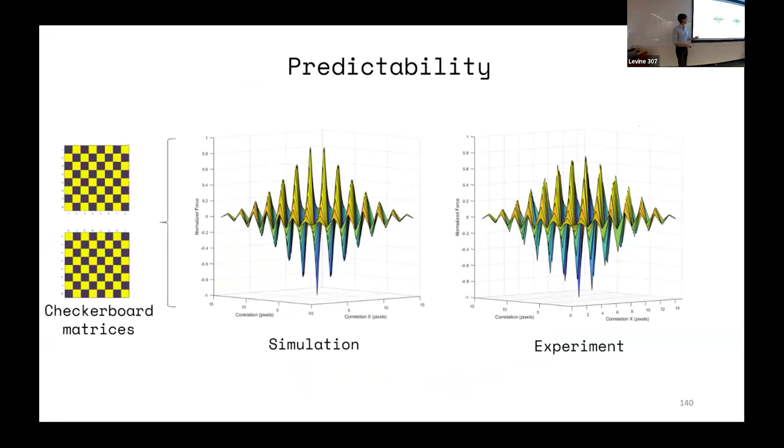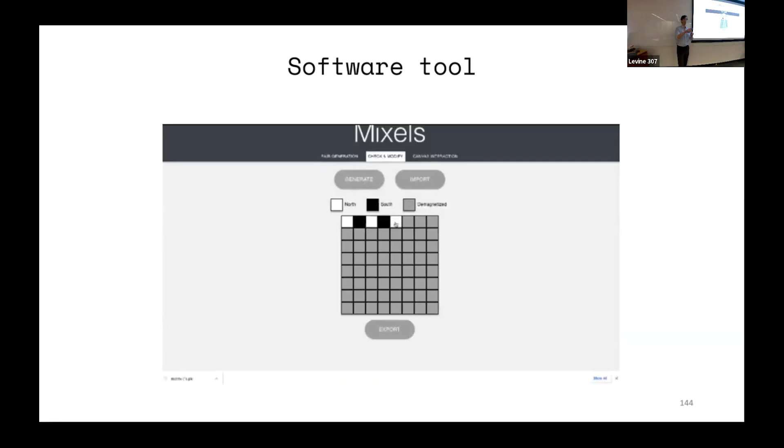Finally, I was just going to wrap up and summarize what we talked about, how we are envisioning doing assembly at these three levels: machine level, part level, and material level.